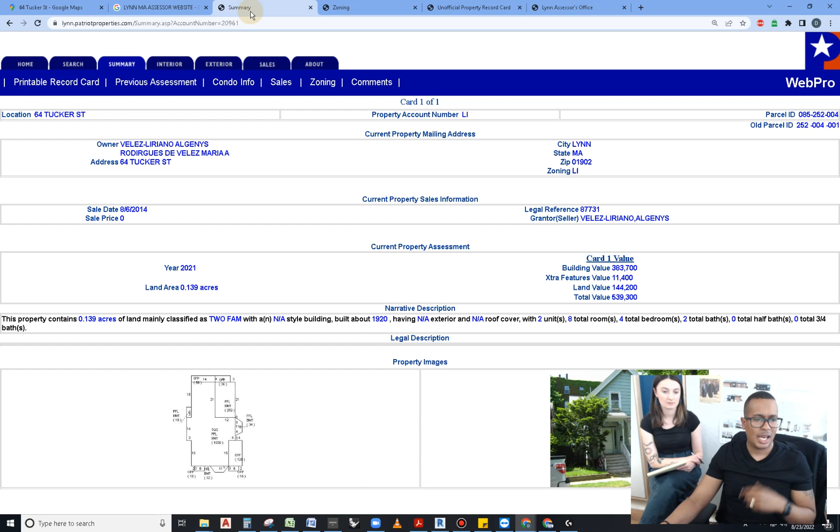So we have our Google Maps on the background, which we've been looking at, we have our property card, and we have our video from the initial consultation. Now we're ready to actually draw. I'm assuming whoever's watching doesn't know any Revit, so I'm gonna try to explain things a little bit so that I can continue to increase diversity in the field of architecture, and make sure that people learn from whichever background they may be.

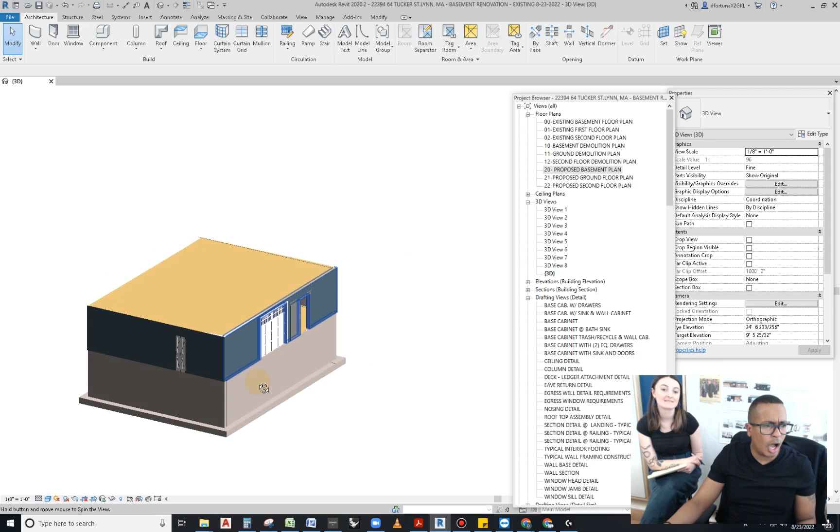All right, so I've cleaned this thing up. This is not by far what we're doing, but where do we go? We go to our basement floor plan, and our basement floor plan we have a box. This is important because now we're gonna make some decisions. We're gonna decide what's the front, what's the side.

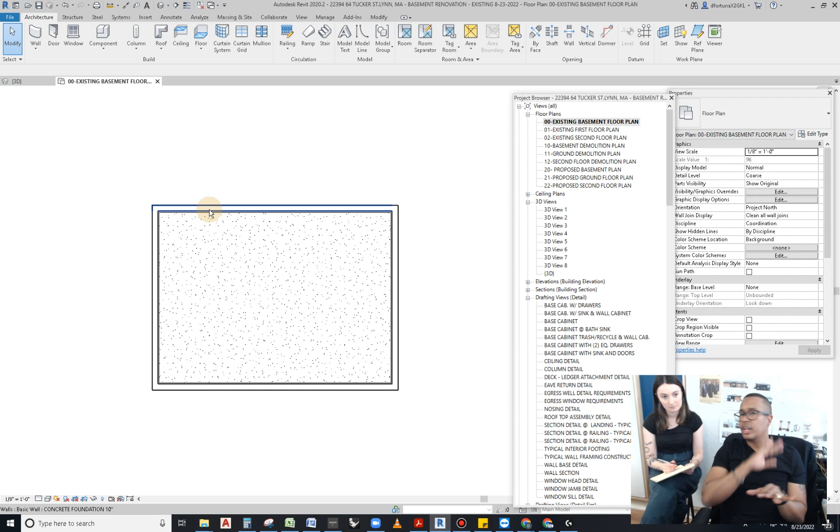Throughout architectural history of drafting, we've always liked to either put the north up - that's one way of laying these out - or ensure that either the street's up or the street's down. In this case, my preferred method is the street is down. I don't care where north is. We're gonna do something called true north versus Project North, which is something else. A lot of people don't know about it, so we'll get to it another day. But these are the decisions.

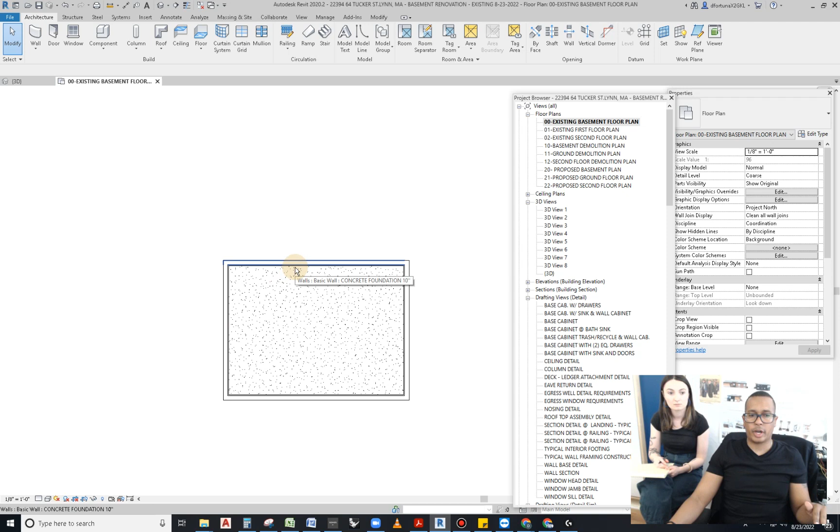So literally, this is gonna be my front entrance, this is gonna be my side yard, this is gonna be my left side yard, this is gonna be my rear. That's the first decision we're gonna make. So that said, what do I need to be able to create my massing? Well, that baby right there - that baby's pretty good to me. So we're gonna figure out how to get it in.

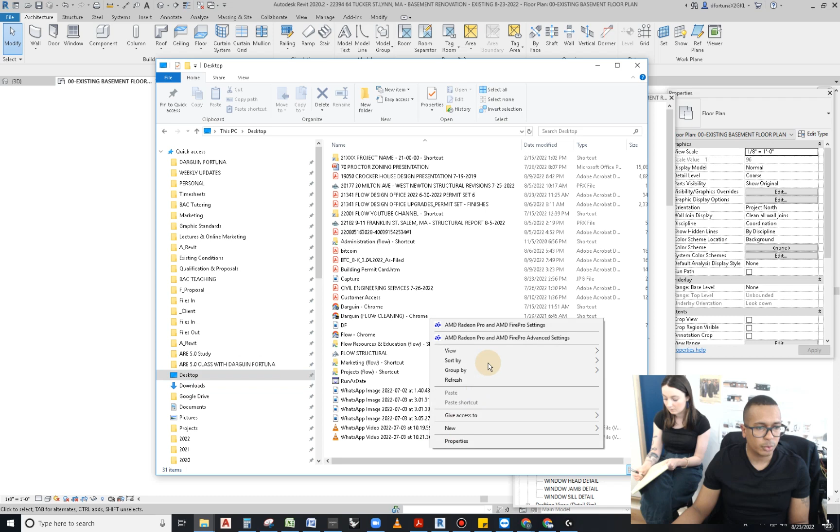You're like, how do I get that thing into my model? It's simple, find it on the desktop. Don't leave it on the desktop though. Find it on the desktop where you have it, and I'm gonna have to sort by date because I keep telling people not to save everything on their desktop, but I do. Sorry, do as I say, not as I do. Okay, so then you just drag it and drop it.

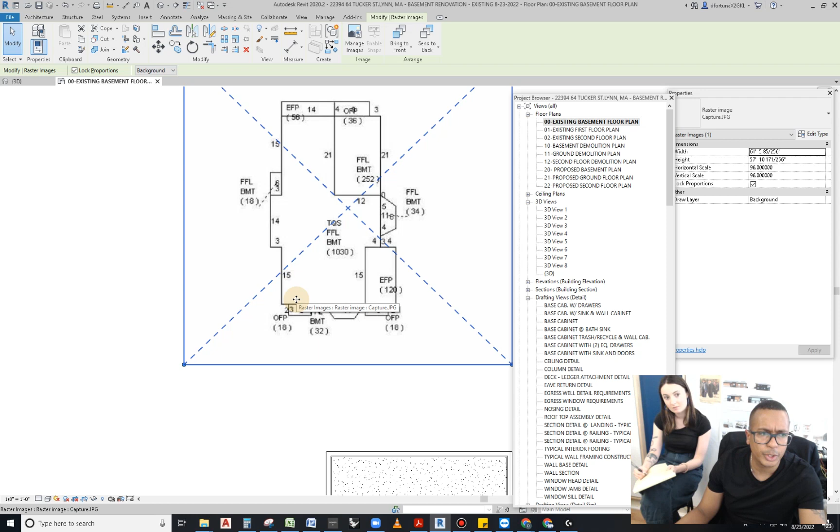All right, so the next really big step is to scale this baby. You're like, whoa, you just dropped that image in there, should we just trace it? No, we have to scale it. How do we scale? Everybody drum.

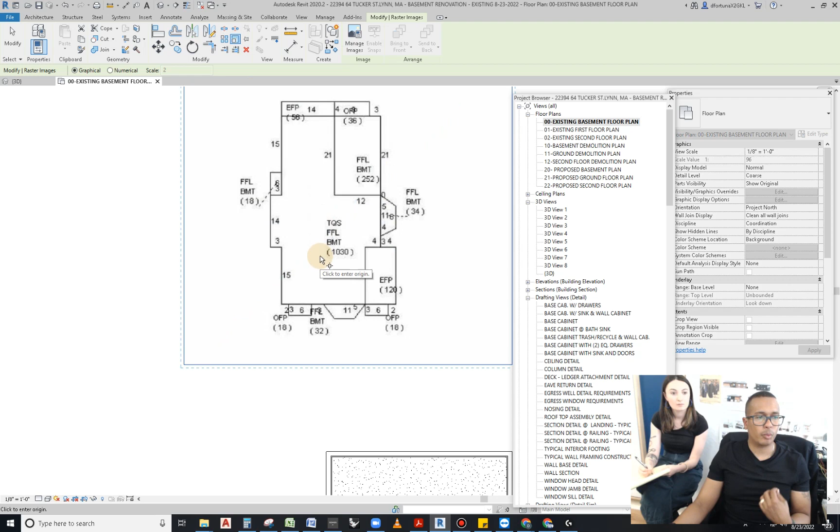So we select the image, we pick this button right here that's called scale, and the shortcut is RE. The first thing you're going to want to know is a reference point. The reference point could be that corner - okay, that's point X. And now we need to know point Y or whatever, right, that one. And what size is that going to be?

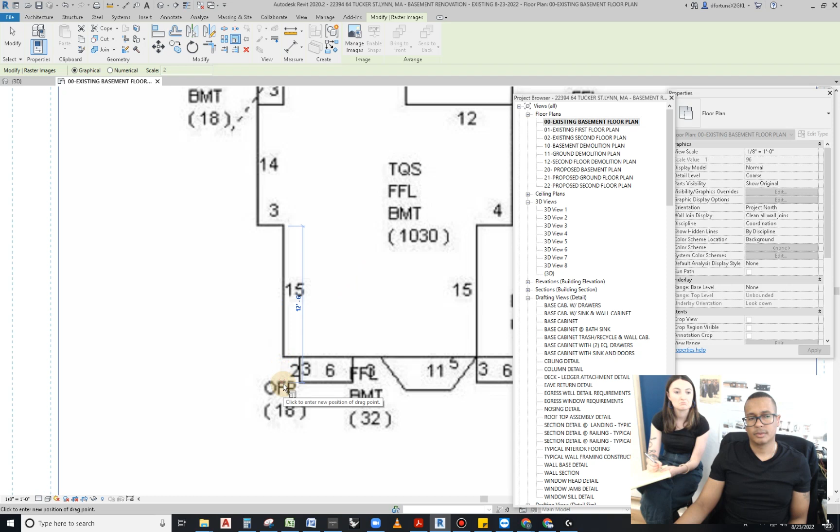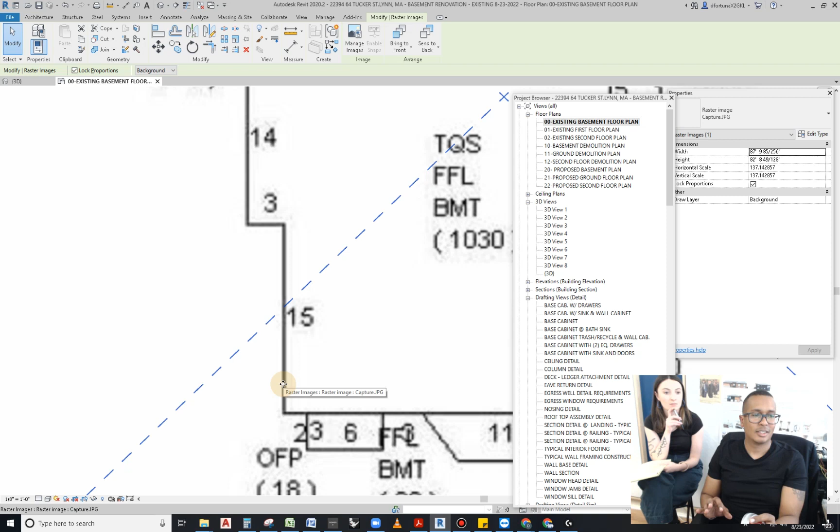15 feet. This property card actually has dimensions of each one of the faces - 15 feet, so you're just gonna type 15 feet. And wait, done. What if it doesn't have that? Hold on, that was easy, yeah, 15 feet. What if it doesn't have that? So property cards typically have that. If they don't have that, we'll go to Plan B.

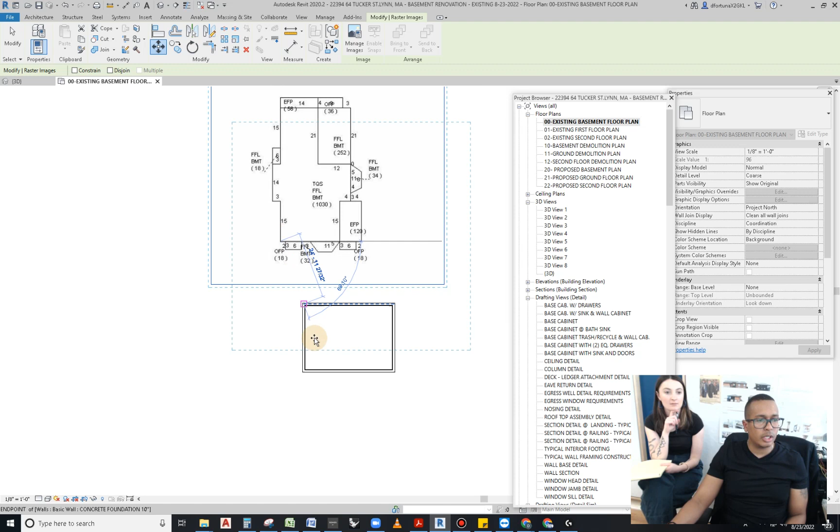So that's there, that's done. Perfect. What do - I'm going to type MV. I'm going to pick this corner and say that corner is going to be that corner. All right, you're like, okay, I can see it, we're good, we're moving along. But hey, the floor is hiding my space, I can't really see it, the floor is hiding my entire space, I can't see it.

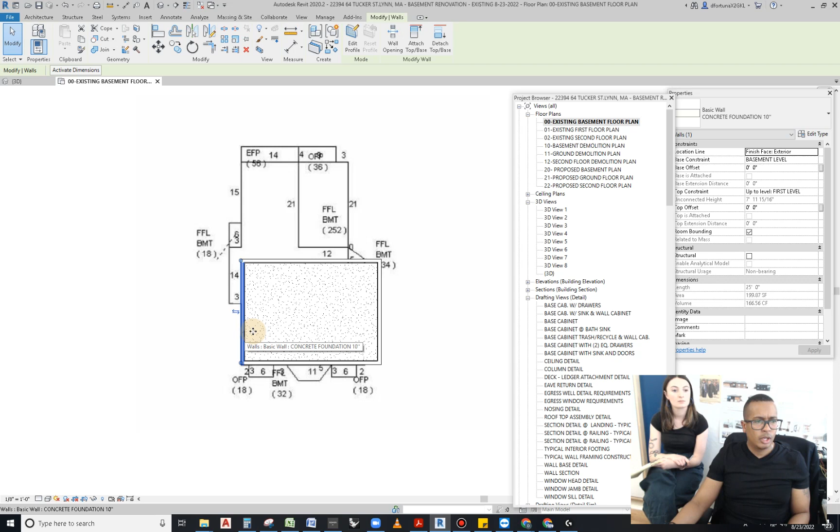Well, you can go to VG, visibility graphics, find floor, F, F, F, F, and hide it. Literally, you can hide it. You can say, you know what, I don't want you to show up at all, you don't exist to me.

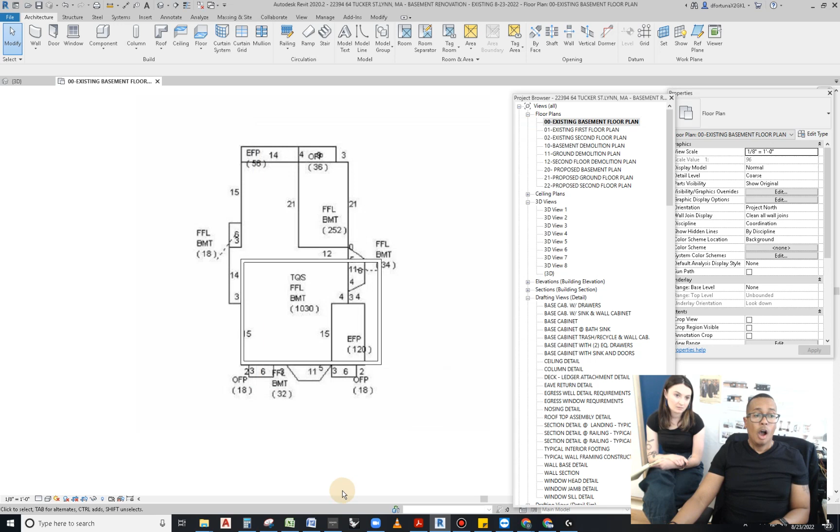It's showing up. Oh my goodness. That's one option - I just click on undo, Control Z. But the other option is to select that, and that can be either on the background or on the foreground.

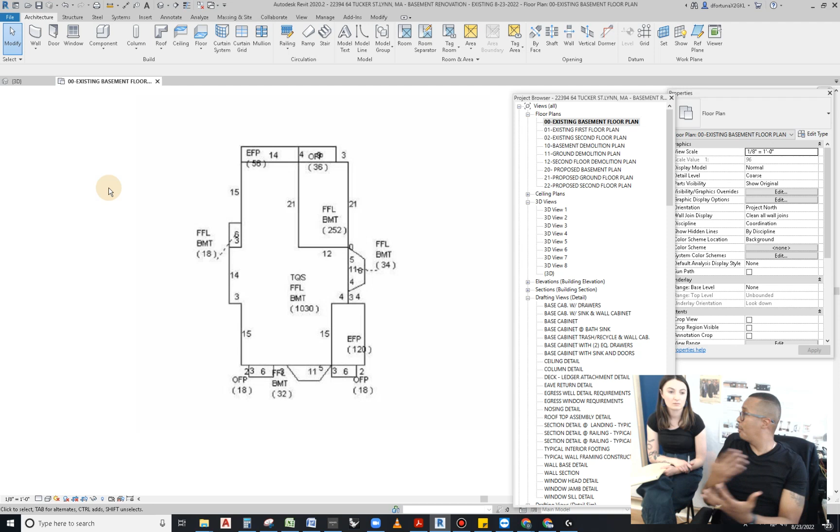Great, it's a problem - we can't see where we're drawing now. We need both, really. So what do we do? In my opinion, you can just select that, and I think there's a way of giving it transparency, maybe not.

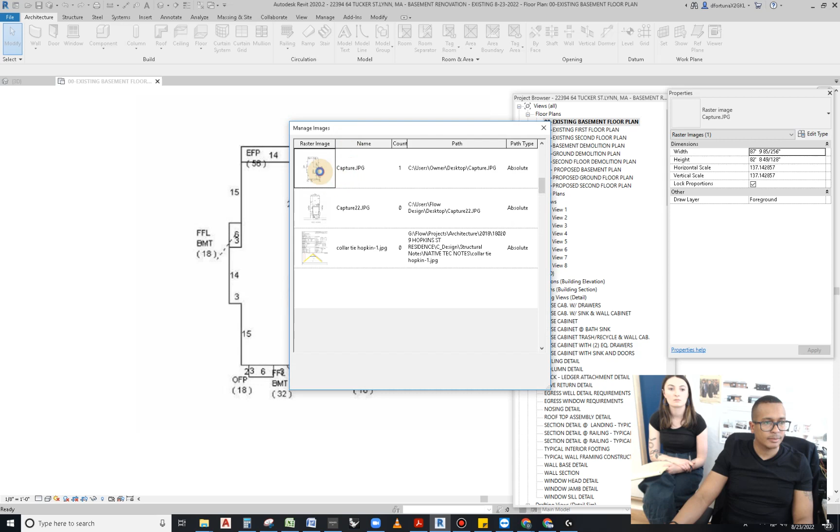I just clicked on that to see if I can do some transparency. No, I can't. Well, that doesn't work, so I don't like it on top, and I don't like it underneath. But we want to see it, so I guess you can just hide the floor.

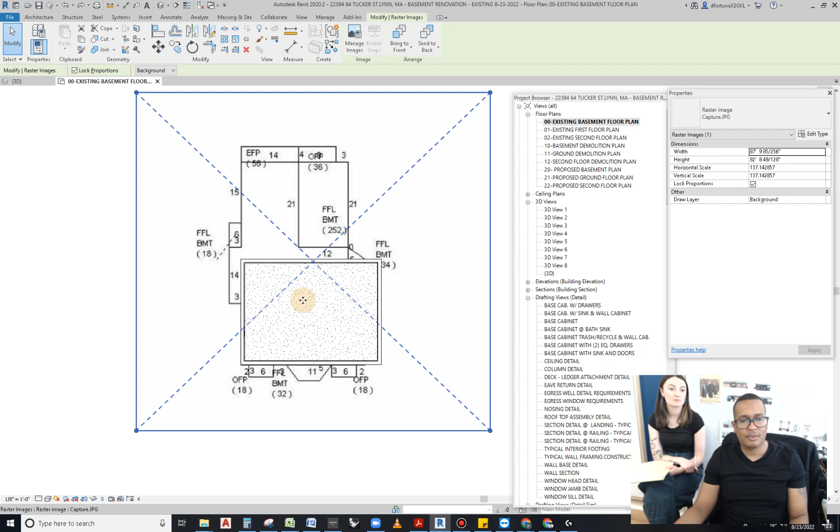You can literally just hide it also by clicking it, and I just hit tab. Tab allows you to move through something - I'm hovering there, so it's tab, tab, tab, tab. So that's that, you can just hide it.

All right, now you're like, oh, I hid it, I don't know how to find it. There's this little light bulb here, and that's it. By the way, if I make any dramatic noise, it's not making fun of anybody - it's just me, I forgot I hid it and don't know where it is. It's happened to me.

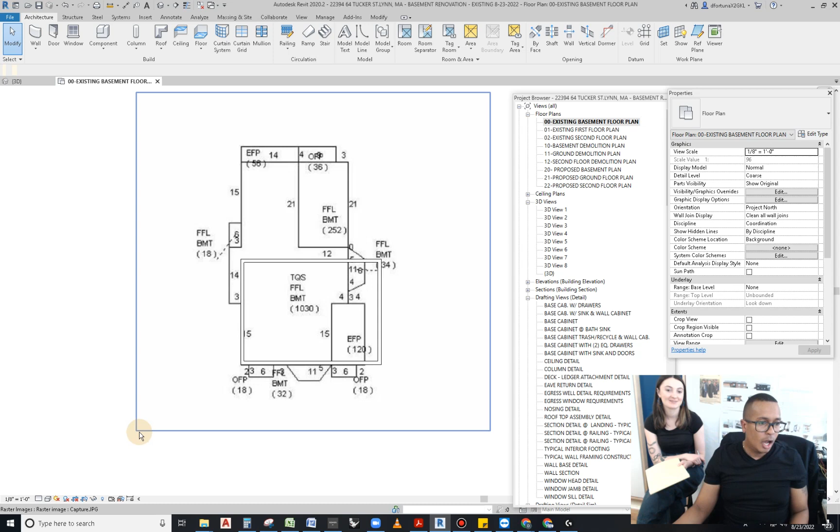So that's it, and then you start just appropriating these walls to where they need to go. You're like, well, but I only have 4 - how do I make sure I keep making more of them? Well, simple, you select one and you click the button CS.

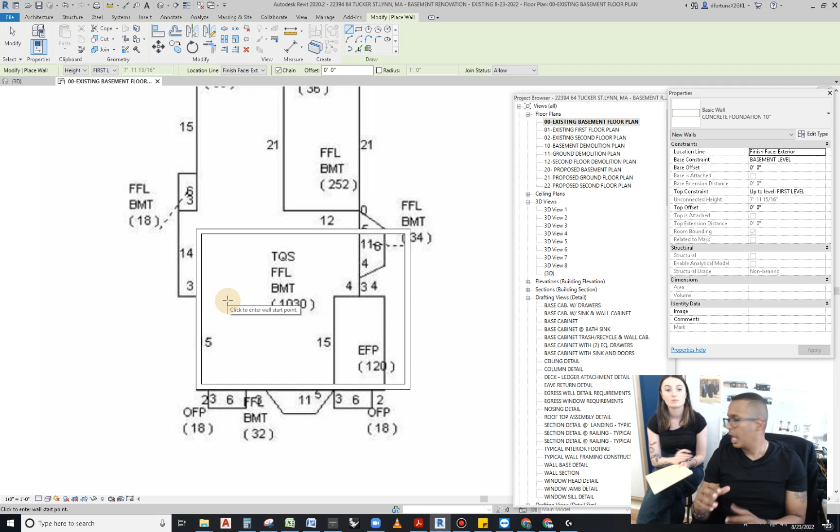CS means create similar. It's one of my favorite tools in Revit. It allows you to create a copy of whatever you already have in there.

And right now, as you know, our status bar is telling us we are on a wall that's 10 inches thick, and it's a foundation wall. Great, we're in the basement level.

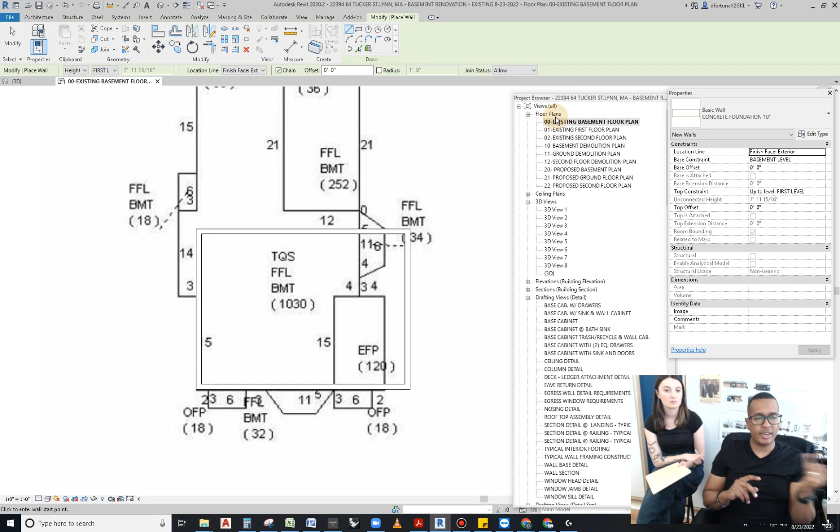Checklist, real quick: we're in the basement level, very important to draw in the right place. We are on the existing plan, highlighted here in black. That's great, and we have an existing outline to draw with, and we have the right wall, which is a foundation wall. We don't have an exterior sheathing wall or siding. We're good, we just start drawing.

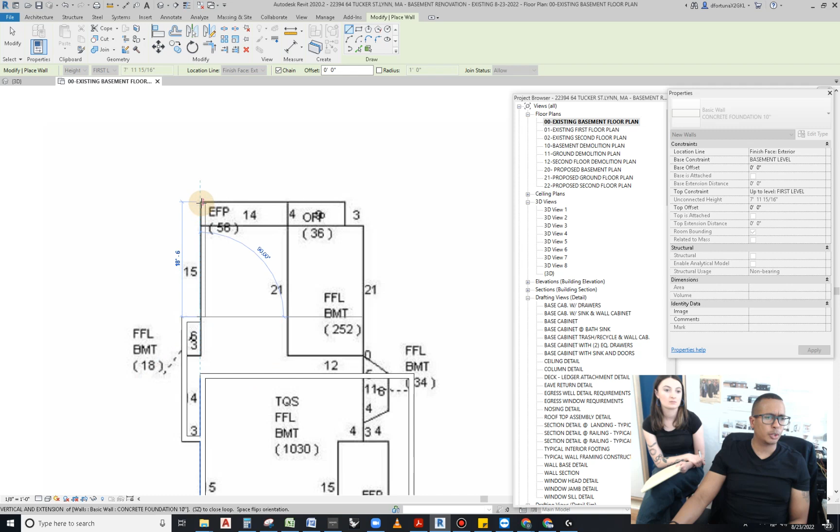All right, so literally it's just - have you played the follow the lines game? So you just follow the line, you're basically just tracing. By the way, follow means 'speak' in Portuguese, but we're not trying to speak Portuguese - we are just saying follow in English, okay.

So that's that. You're like, okay, looks good to me, looks good to me, looks great. Okay, we're going all around - beautiful, we've already outlined our entire building.

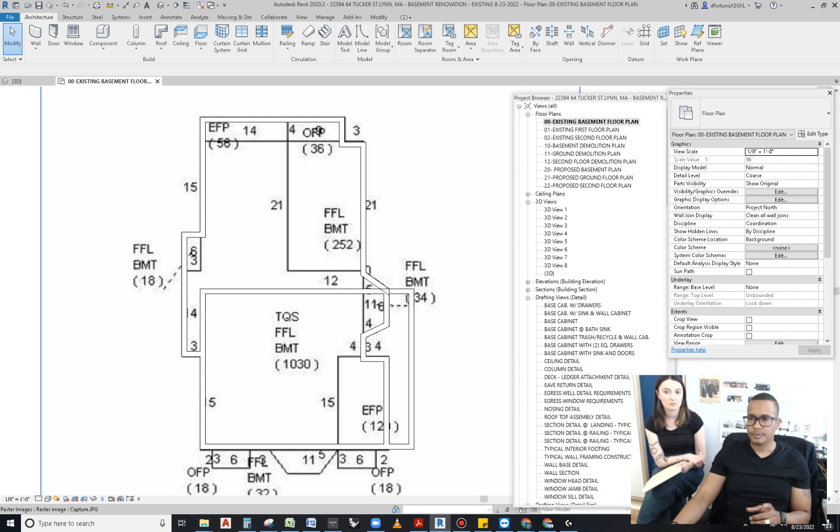That's great, let's take a pause for a second. All right, so we've already traced around most of this building. There's a little trim work that we need to do, and by the way, to clean things up, it's just TR, click on 1, and click on 2. Nice, click on 1, click on 2. Yep, and then these guys are extra - we don't need them, go, adios.

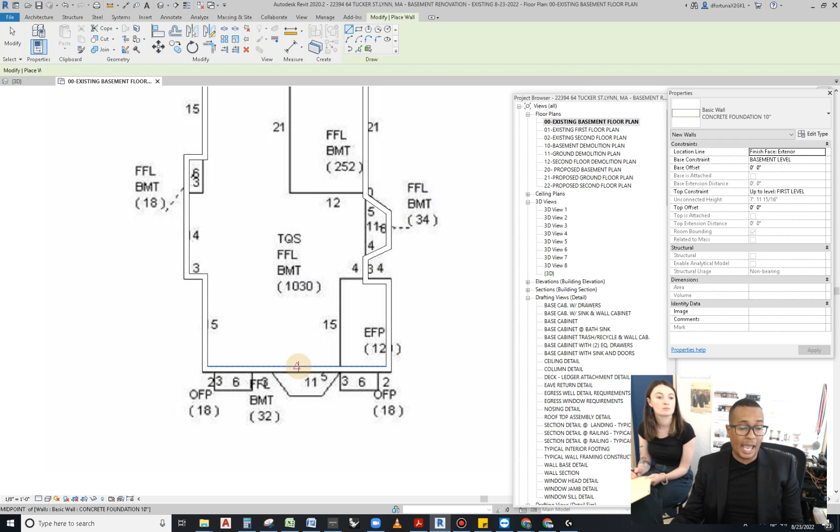And then we keep creating similar - CS, I'm sorry, create similar. Okay, and we create another similar here. It will continue to create similar until you end the task. Create similar, and you can - I just hit the bar, and that flips things around. Okay.

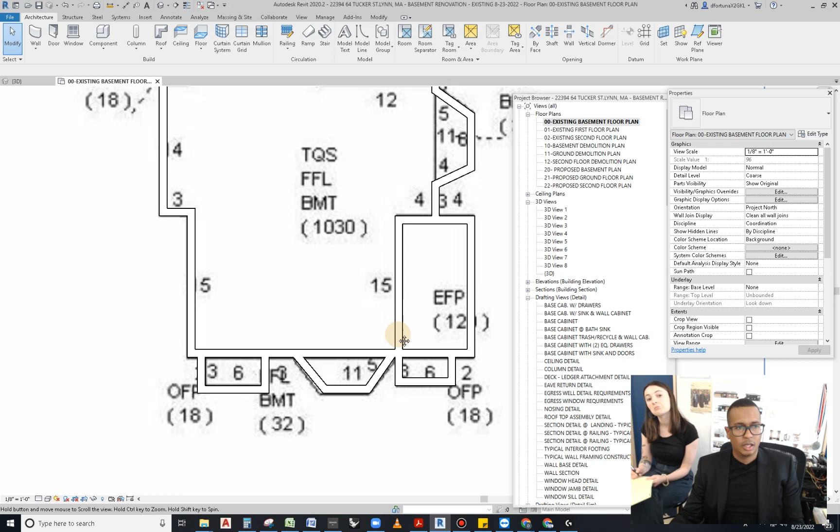Then I guess we can probably just TR that into that. It looks like that's how it goes, right? Then, you know, I can probably also draw up these guys, these divisions that you see here. Even though we don't know what they mean and what they are, well, they're there, so let's respect them, right? See, they may have a meaning later.

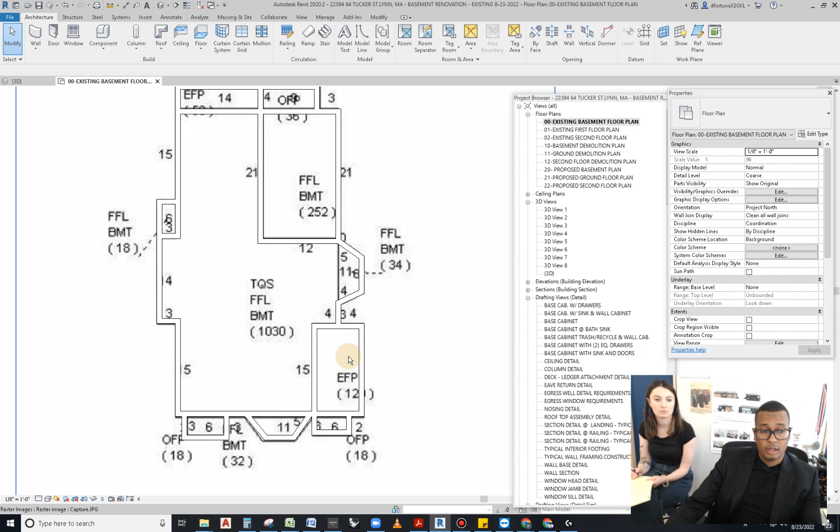But this will be your nice little sort of basement. By the way, this is actually not the basement, this is the first floor. First floor level - ah, but it also says basement. Yeah, this is the basement. This is the basement, BMT - this is literally the basement.

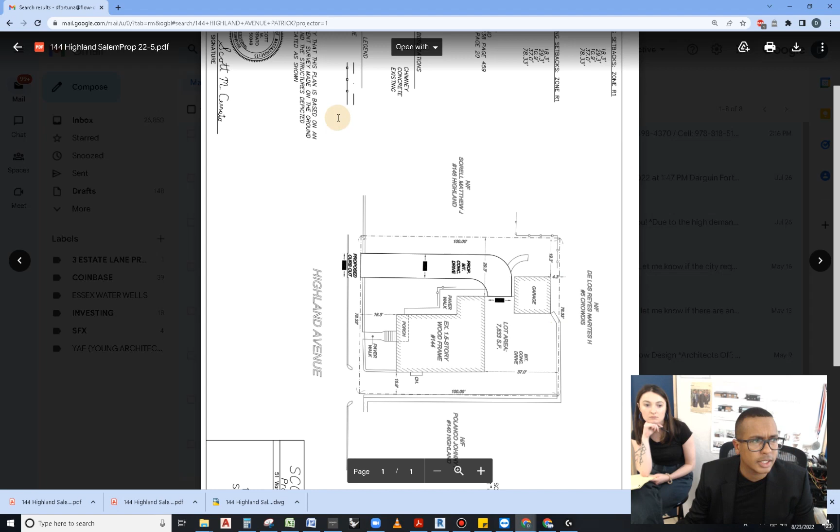So now I wonder, do they have the first floor? Oh sorry, this has nothing to do with that, my bad guys. But where do we see the actual first floor? Doesn't matter, but that's the basement - BMT means the basement.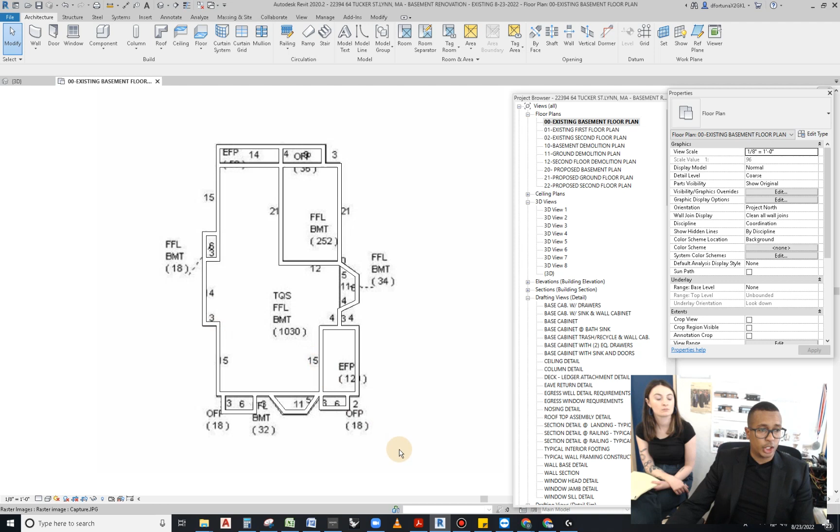Yeah, and it is how I remember it, by the way, from when I went. So this is very good. You're like, well, are we done?

Yeah, pretty much. That's all I need. If we needed elevations, if we needed a bunch of other things, this is all I need. So we go in here and you're like, oh my goodness, this is completely wrong. We just have to make sure that the upper floor follows the lower floor.

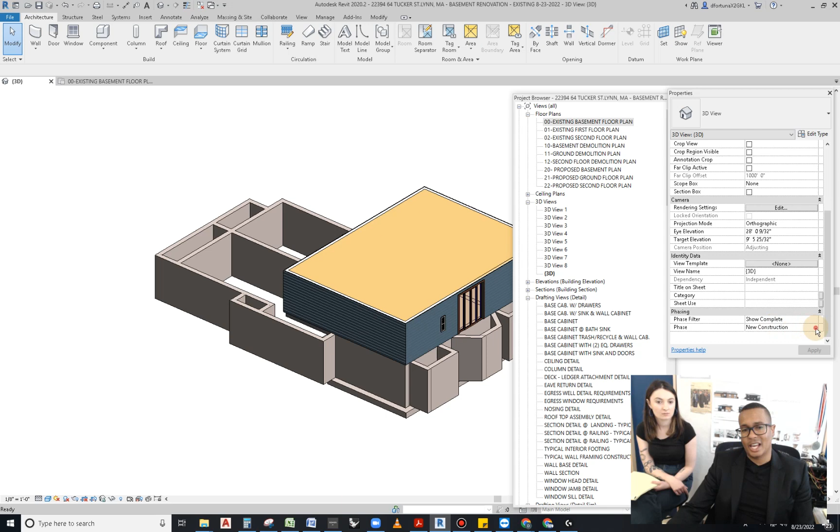So if you want to be fancy about it, I do something else to create similar. But wait a minute, make sure this phase, you see, is new construction. We gotta change that if you're gonna continue doing existing. So then you can go here and say create similar.

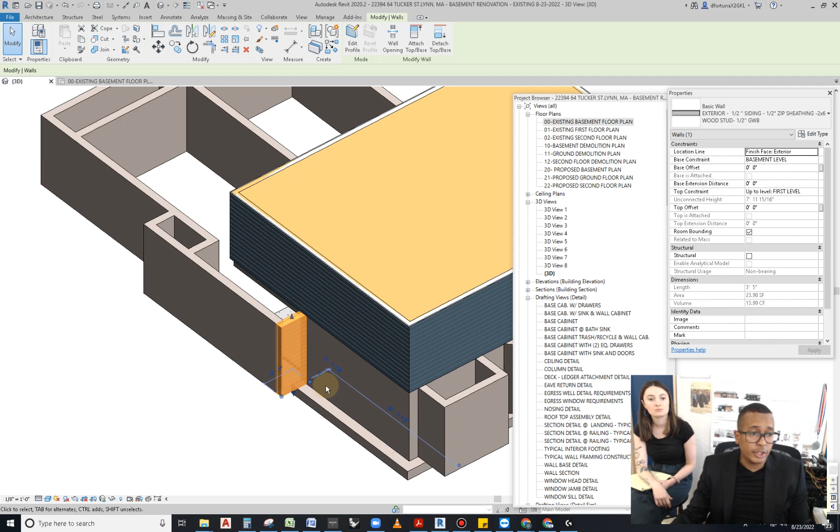CS, and pick the outline. Okay, sorry, you can do the outline of that. So yeah, you can do create similar here, like I said, and then you can do the whole outline of this whole building. Just make it look accurate, but I wouldn't get too crazy about this stuff, right?

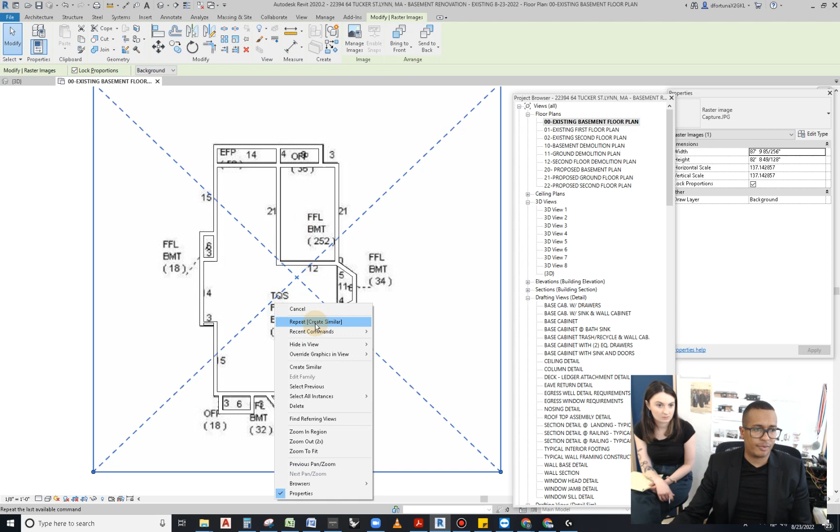So all we really want is a beautiful, clean plan. You can probably create rooms if you wanted to, or make it more fancy, but I don't really care about it. This is good for me.

You throw this into a sheet, and the sheets that we use, by the way, are the presentation style, and this follows our process. You can throw that, delete it.

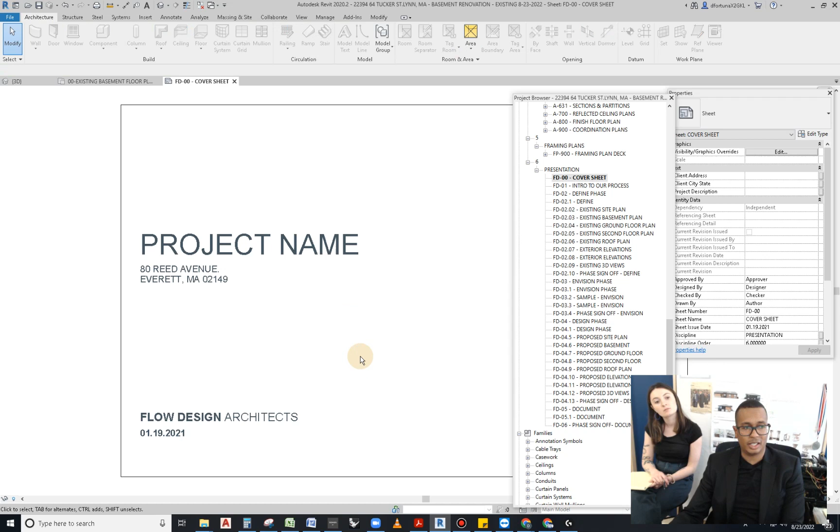You can name the project appropriately, which is 64 Tucker. Well, that one, you don't type anything. You always copy and paste. That's true. So you just come here, it's just easier to do this.

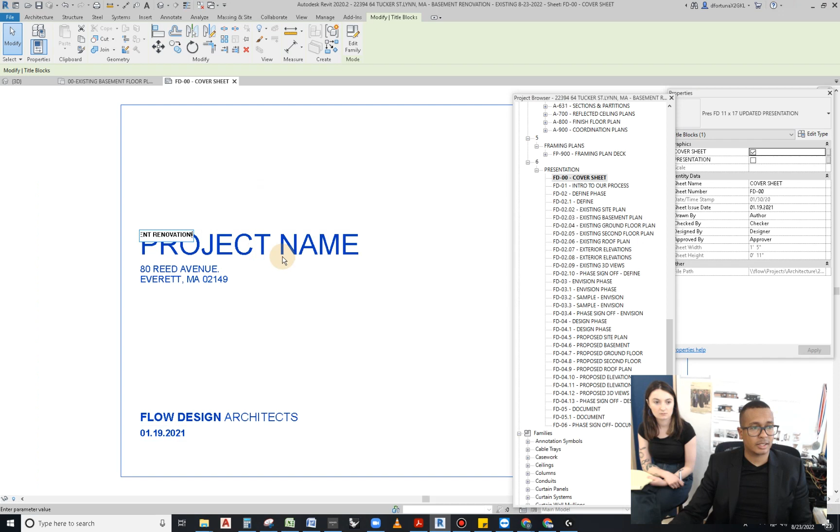Come here, that's the name of the project. You can actually delete the project number. And what's the address? Well, it's the same thing, 64. Paste. Paste. Okay, done. Perfect.

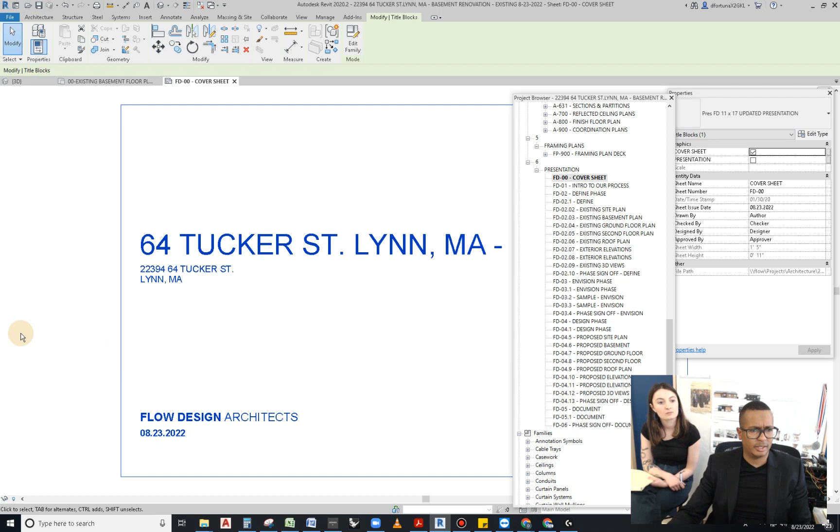Then the date changes, 08/23/2022. Even that I copy and paste on the other. Oh my goodness, this text is too big.

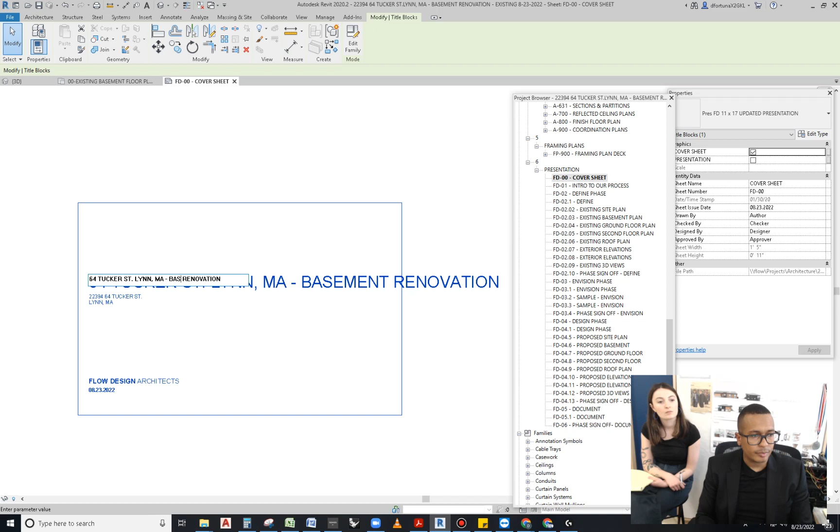You can just do BSM. I'll just say renovation. No, so you can say basement reno, and that will fit. No, it's gotta fit. Okay, it has to.

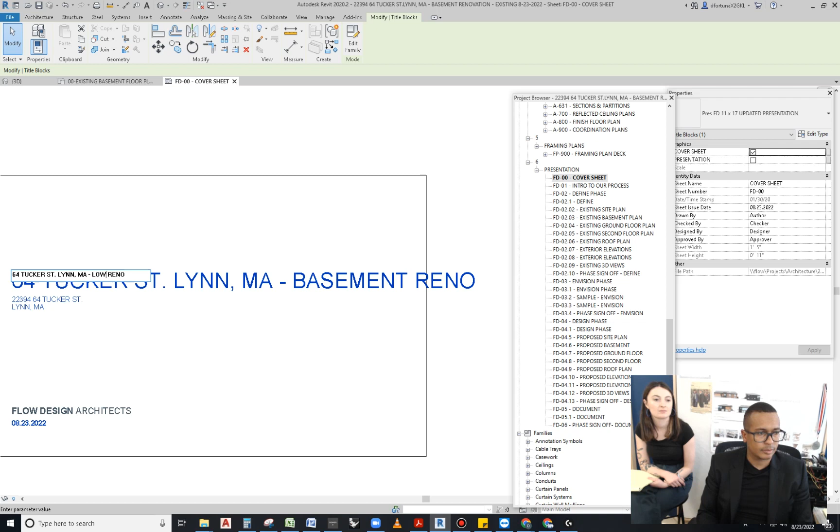BSM. There are a couple things you can do, but that's still... All right, there are all the options. You can edit the template and edit the sheets and make it smaller. Let's just call it reno for now. We'll figure it out later.

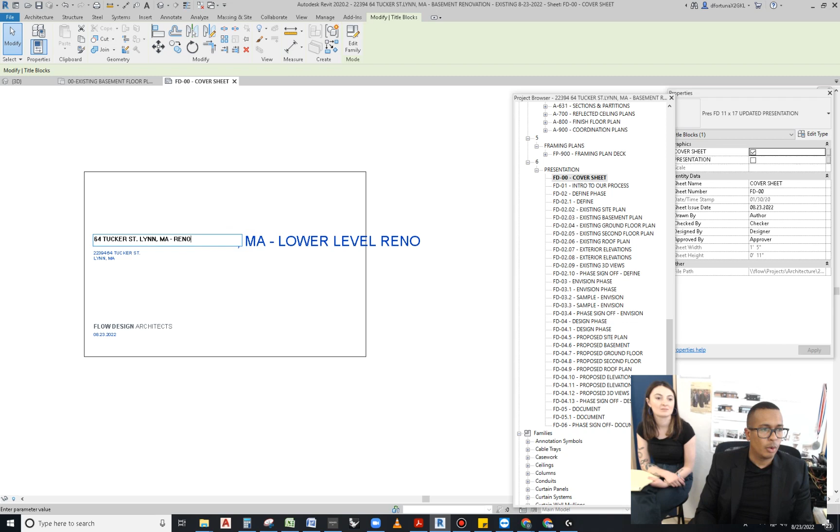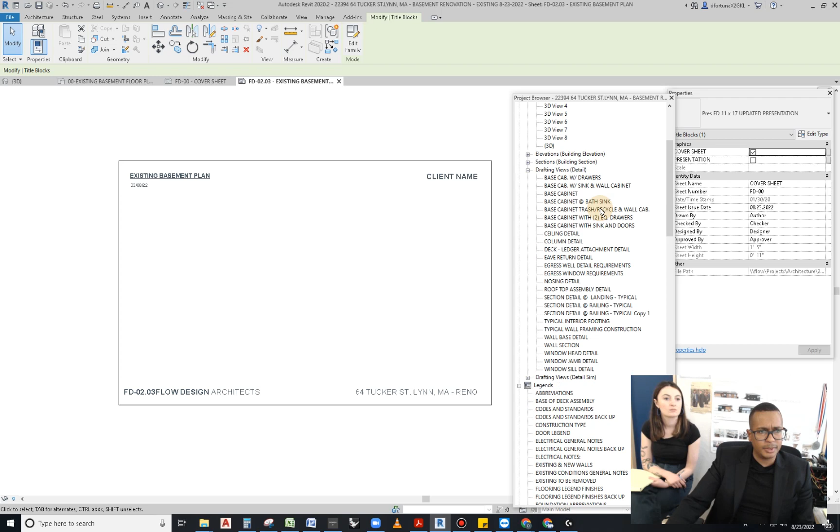But then you come in here and grab your basement plan from our project browser, basement existing. Basement, existing. Oop. Okay, here you go.

That's good. Things I like, have it as big as possible within the sheet because we're gonna sketch and I write really big. So one thing I would do, even though for construction documents I want the plans to be like that, for the measurements, I don't really care.

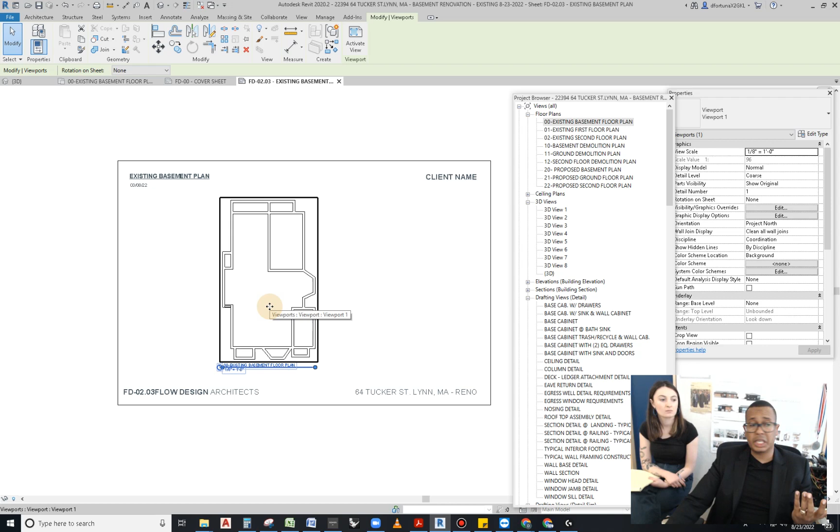So we could turn this on right here and rotate it. I just say RO, rotate 90 degrees, and then have it like that. So now this is the front street. Okay, and then change the scale to 1/4, right here. So that's bigger.

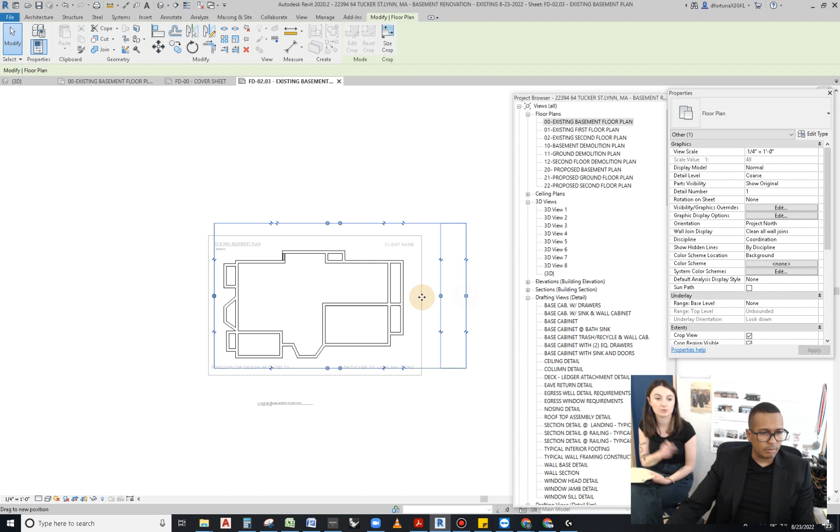Undo. And I'm gonna then grab this baby really close to it. That's it, that's it. So you're bringing this. That's it. I don't even need the title, to be honest. I don't even need the title.

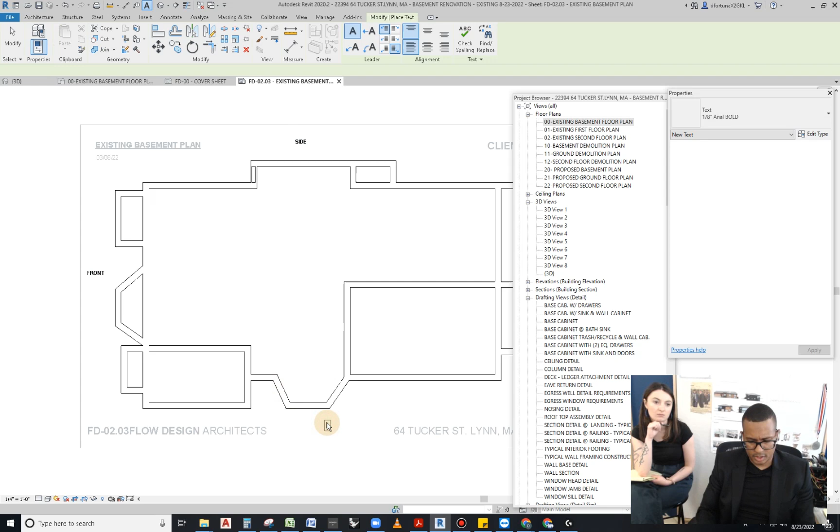So you can turn titles off by selecting the view and saying no title right here on the properties. Doesn't have the title, that's it. I do need to know, like, sometimes I type things like front, side, rear. It's just for purposes of understanding.

And then we're gonna write, you know, Mr. Velez Liriano, right? I think it was the name. Right, make sure the name is right. Make sure, really, really important.

Really, really important. Like if I call you Haley, how would you feel? You know, your boyfriend calls you Stephanie, he will be dumped that same day on the spot.

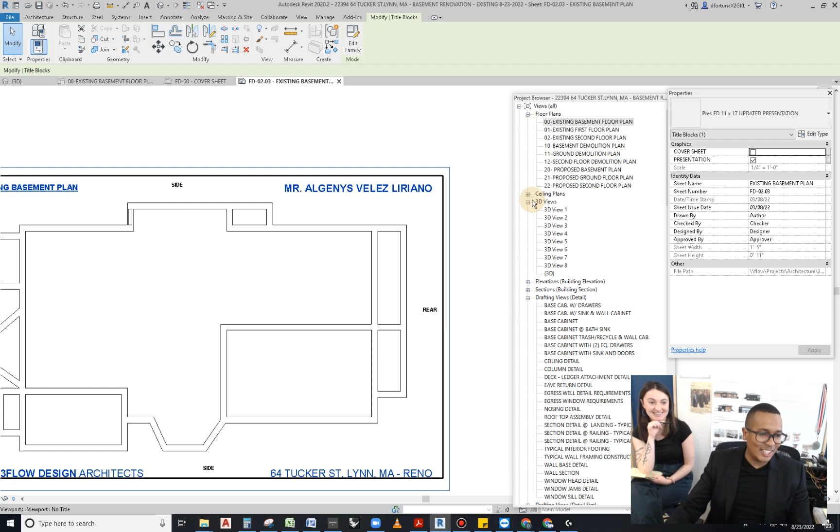Calling the person the wrong name has a meaningful impact. That's something I learned from How to Win Friends and Influence People, the Dale Carnegie book. Names are really important, really important.

So this is good, and I only use the property, only use those things that I had. But other things I want you to do is locate windows and throw some in, locate where the entrance is by looking at the video and say the entrance is here, let's throw in a door.

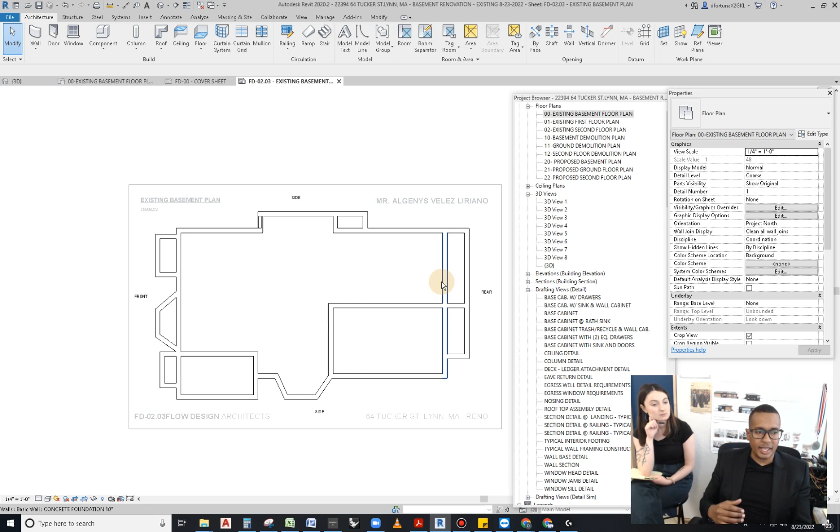If you just did this, I'm happy with it. But if you go above and beyond and try to locate where the windows are and make it a little nicer, like this should be 45 degrees. So DI for dimension, then angular, and come here. Typically the stuff is like 45 degrees.

What's the opposite, the inverse of 45 degrees? I should know that, I don't know. It's doing it weird, but it should be angular. So this one's 45, this one's 150 - they should be the same. Long story short.

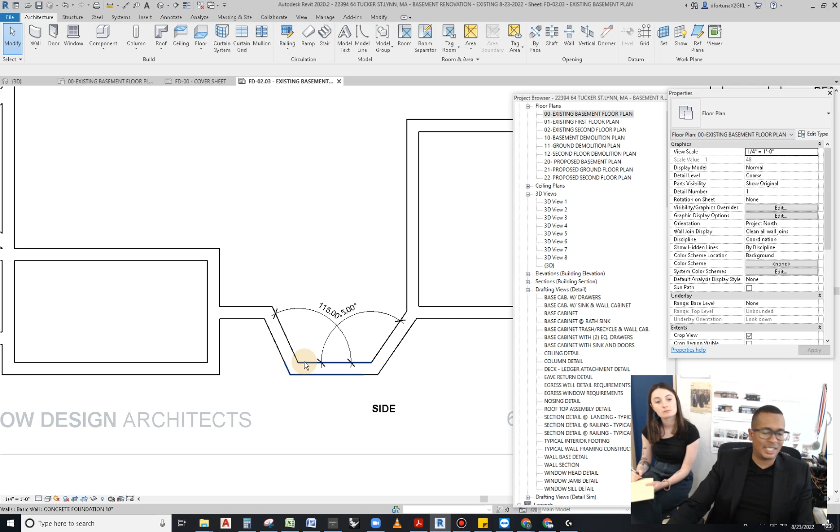If we wanted 115, let's just make it 115 each. Later on we'll figure out exactly what they are, but that looks about right - see, that looks more clean. So you can disregard some of the property stuff later, just clean it.

There's a door somewhere in here - that's not the door, you can just do openings. Throw in some 35-inch opening here and another one.

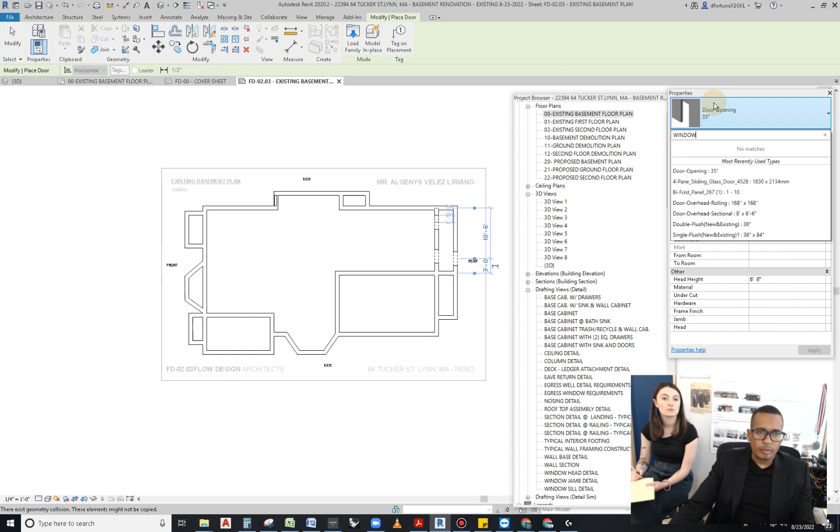Windows - I know windows is WN, so you can just look for a basement window, which is like this casement type. I know there's one here and another one here, and you're like, I'm not seeing it, Darwin.

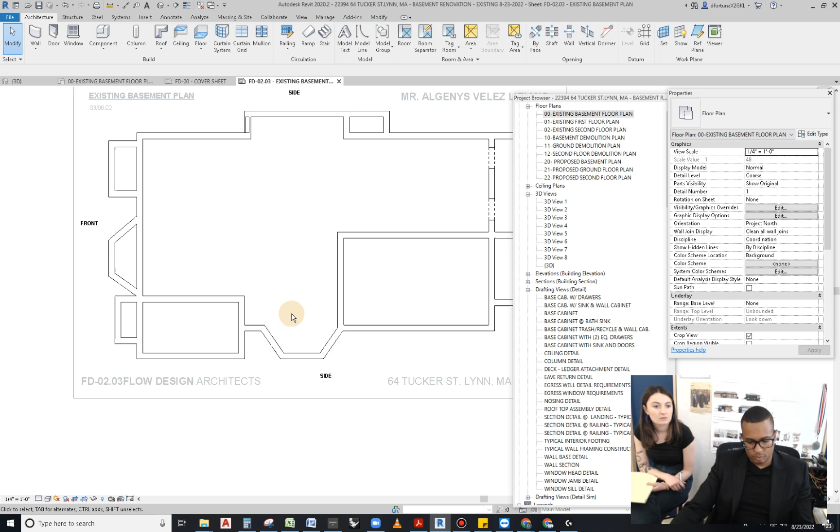What's going on? It's because it's showing really low. So when I do - you see the sill is at 1. You know what the sill is, the lower part. So it should probably be like 6 feet.

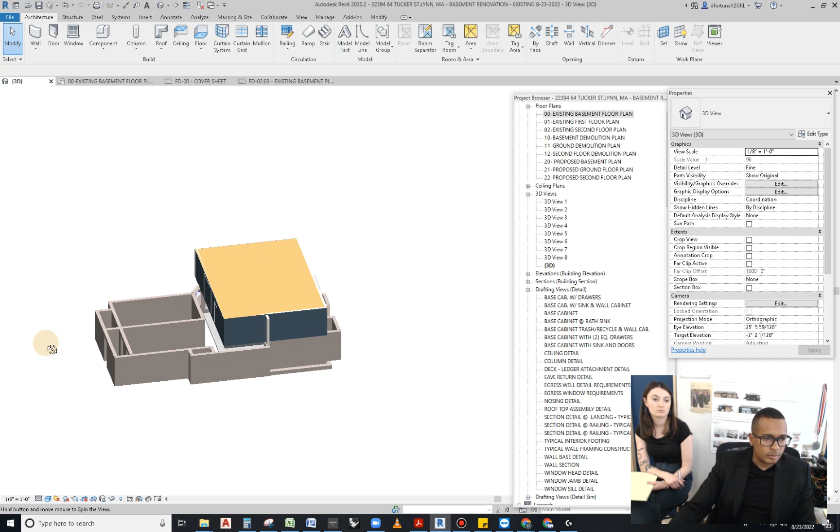Still doesn't show up, that's a problem. So let's put it at like 5 feet. Still doesn't show - well, you can fix it on the 3D, because they're too low.

Okay, and you can massage this and get it to, you know, 6 foot 8.

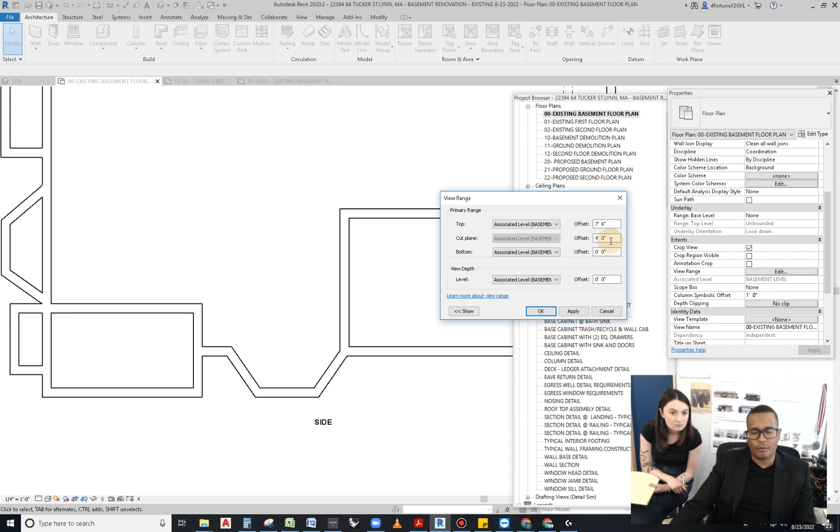If it doesn't show up again here for whatever reason, it has to do with the crop of your particular view. Right now your view is cropping at 4 feet, so nothing below 4 feet is going to show up - there's nothing cut, and nothing above 4 feet either. This explains it - if you go here, it explains what these things mean.

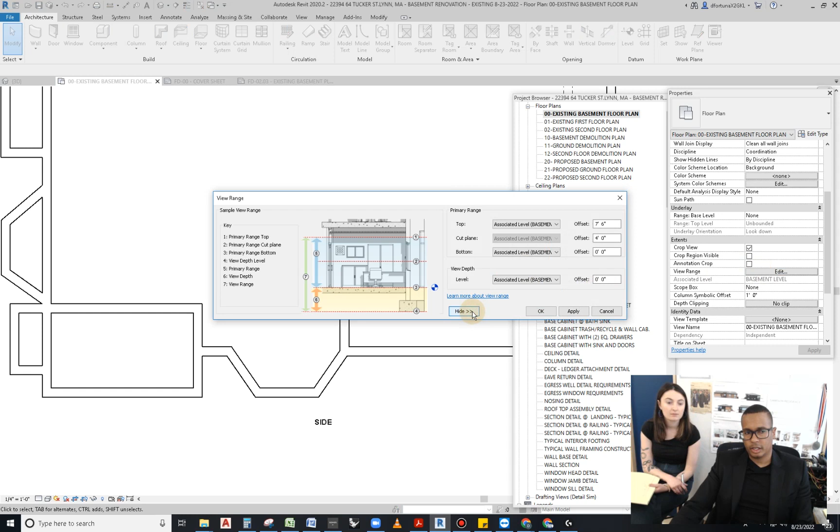But generally you just have to make sure it's in the right place. Like if I went onto Extents, View Range, and then here - oh, and you can watch this because you have it, I'm going to upload it today.

Great, so on that sense, if I actually put a window at a sill of 4 feet, you should see it. Something is not right - I don't know why they're not showing up, something is just not right, I really don't know why.

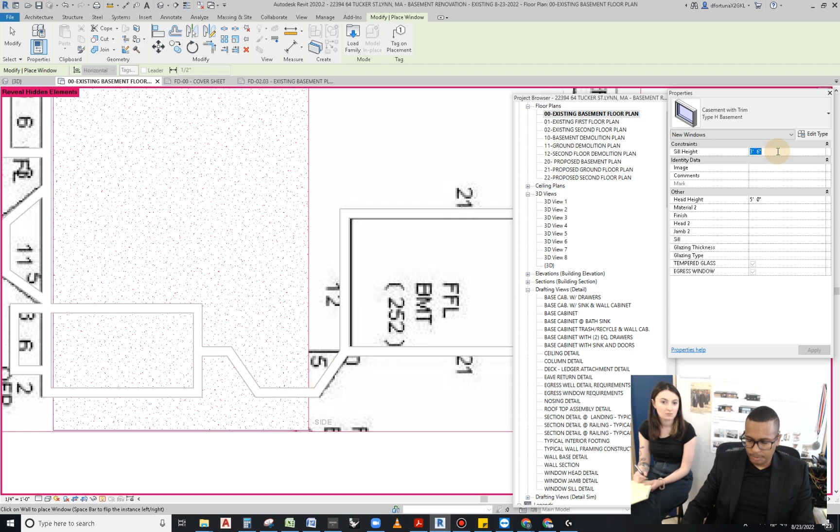3 feet, 3 foot 6, I don't know - well, this we'll investigate the matter.

But for now you do have these, you can continue to clean it, continue to massage it. Go ahead, make a PDF of it, print like 5 copies of it. You're like, why? It rains.

Why might it get wet? I may sketch wrong and not use the erasable pens that we have. We use erasable pens in here, which is awesome, but I may make a mistake.

But you do need one for the floor plan, one for the ceiling plan, because you're going to show what's in the ceiling. Another one maybe for anything particular you want to show, maybe utilities separate so it's clean, things like that. I want you to make that PDF, email it to me, and print it.

Why email it? Because I use my iPad - sometimes I import this into my iPad and sketch with it. And likely I will use that, but I do want you to print it too because I want you to shadow me doing it, so that we do it together.

And we're going to be doing this thing tomorrow. Yes, tomorrow, all right.

So thank you, I hope this was helpful. You can watch it, you can repeat the steps. I want you to continue to further develop this model a little bit more - you still have some time.